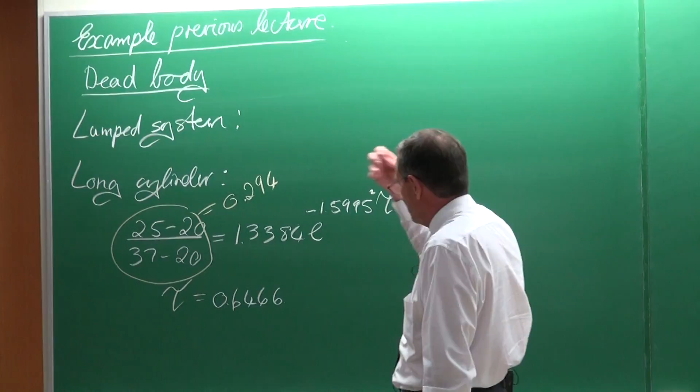Going back to the previous lecture, one of you did pick up that I made a mistake here with this temperature ratio. It should indeed be 0.294. And if you recalculate tau, it should be equal to 0.5923, and then the number of seconds works out to about 90,223 or something like that.

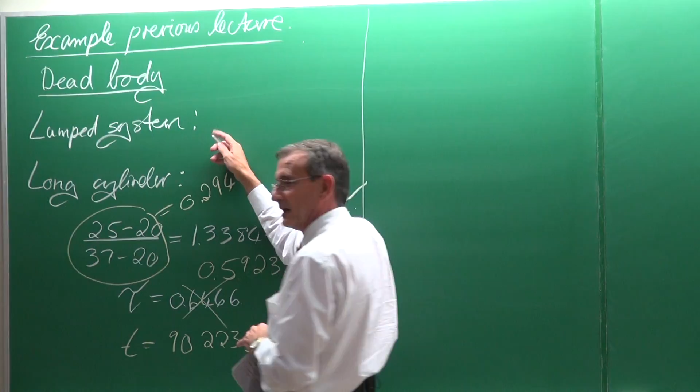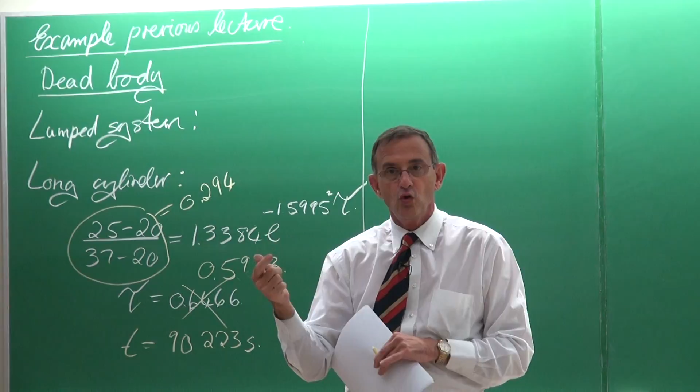Something I maybe missed yesterday to specifically emphasize is that yes, we've used the lumped system approach, but I just did it as an illustration. That doesn't mean it is valid. I've indicated that the Biot number shows that you cannot use it, and our other criteria were that it is only valid for small bodies and bodies with high thermal conductivity. So the lumped system approach is a no - you cannot expect to get good results with it.

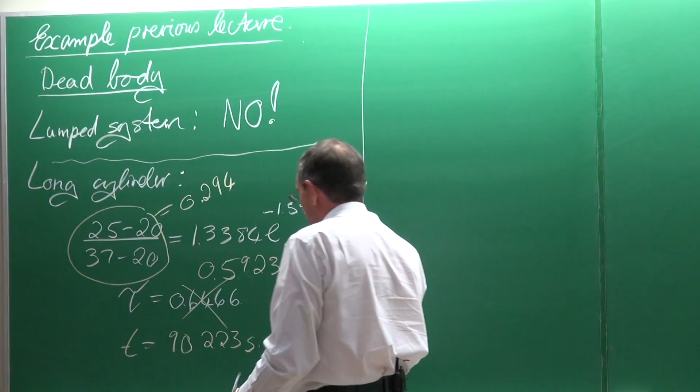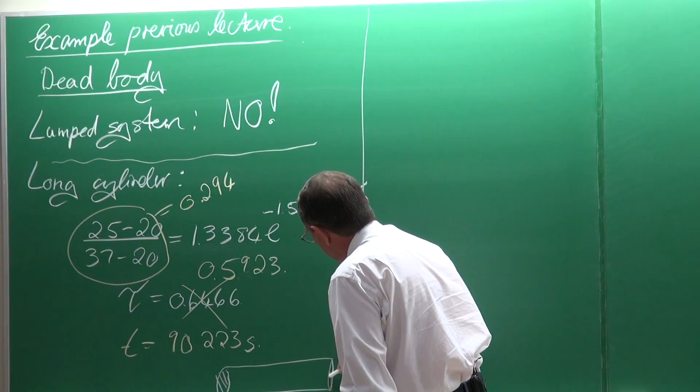The second approach was still not perfect, which was a long cylinder approach - treating the dead body as a very long cylinder. Very long, meaning that the heat transfer rate through the top and bottom areas would be negligible compared to the total surface area. But at least it is a much better approximation than the lumped system approach.

Now today what we're going to do is transient heat conduction in semi-infinite bodies.

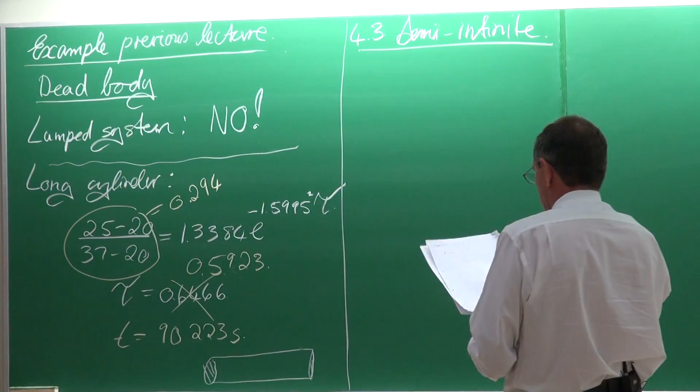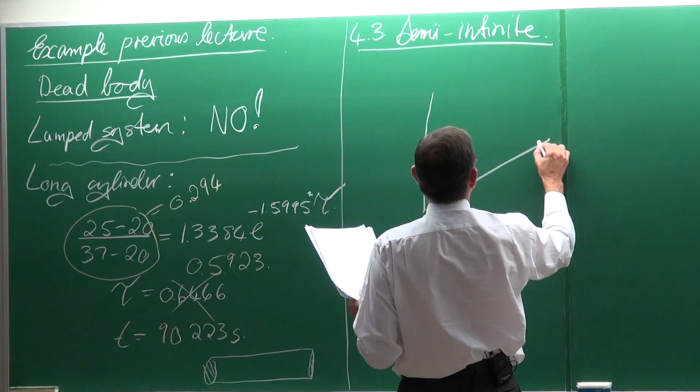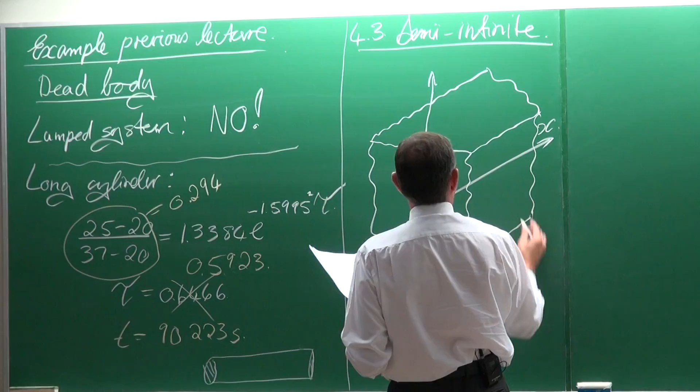Now immediately if you see the word semi-infinite, you will ask, what do they really mean? A semi-infinite body is a body which actually has a single plane surface. I'm going to show it in terms of a coordinate system - in the x direction, like that. This body will have a plane surface, like this. And with that, I mean it's flat, or relatively flat. Then it is infinite in size in the x direction, as well as in the y direction and the z direction.

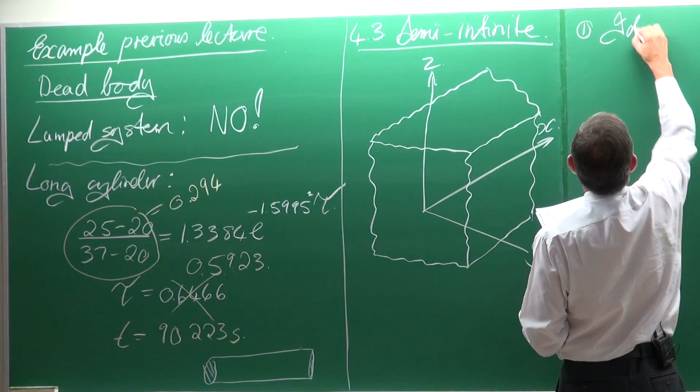So a semi-infinite body is firstly an idealized body. Secondly, it has a single plane wall - with that, I mean that surface area there. That is the single plane wall.

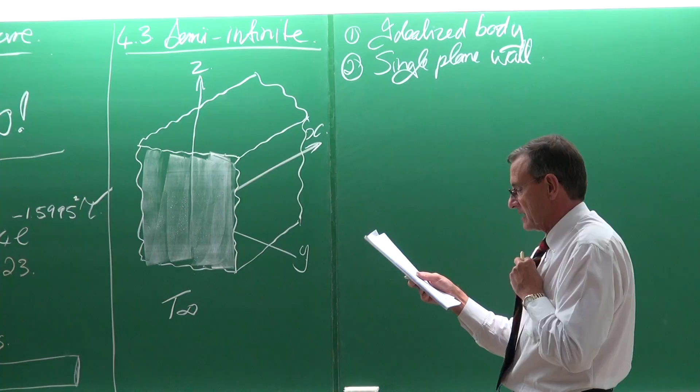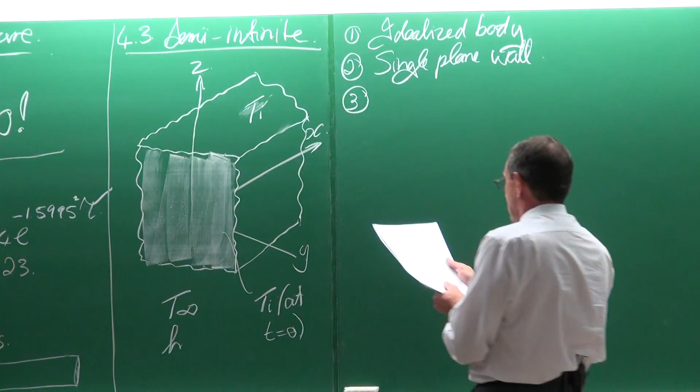This body, or the surface, will originally be at a temperature Ti. On the outside of this surface, we will have a temperature T infinity, as well as a heat transfer coefficient on the outside surface. That surface temperature would be Ti at t equals 0, and the temperature of the rest of the body would be equal to Ti, constant for the rest of the body. So the third property of a semi-infinite solid is that the temperature change is close to the surface only. The temperature of the rest of the body is not going to change - so the fourth property is that the rest of the body has no temperature change.

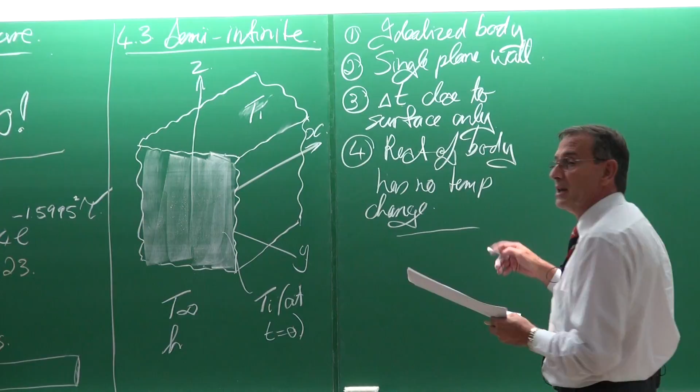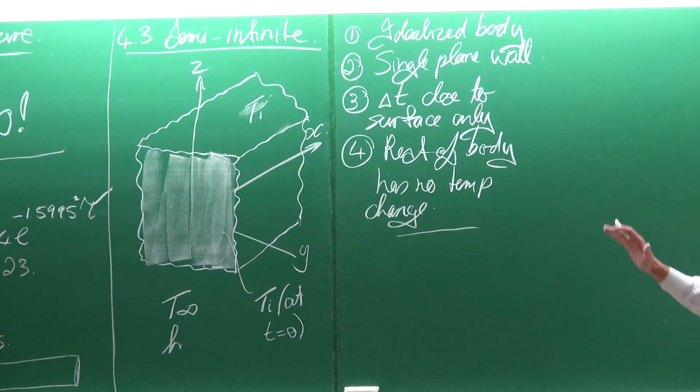Now, the next thing would be to try to answer: which bodies are we talking of? Typical good examples of semi-infinite solids would be, for example, the surface of the Earth. On a certain surface, at a certain place, there will be a temperature change, and that temperature change will occur very close to the surface, but it wouldn't influence the rest of the surface. That would be a good example of a semi-infinite body.

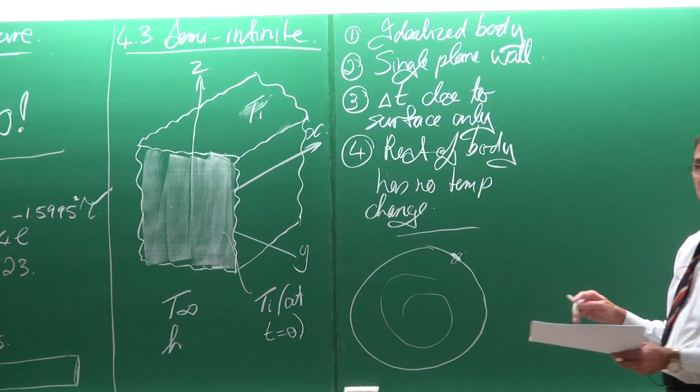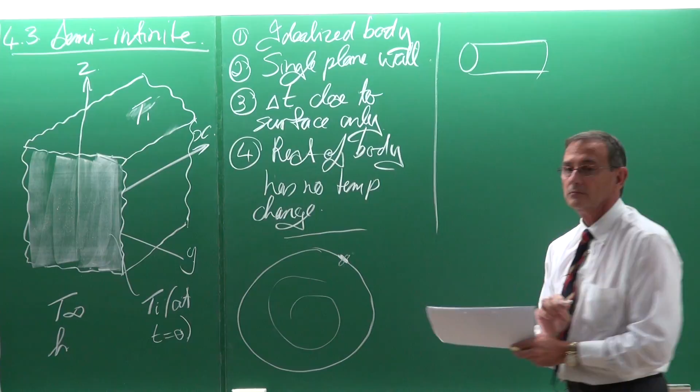Another example might be you as a person - you would say, but how can that be? It would be, again, our dead body, if I can show it as a cylinder. It would be the case of maybe a surgical procedure, or not a dead body, maybe a living person, but you want to do surgical treatment with a laser. The laser is just for a split second, on the surface of the skin, and there's temperature change very, very close to the skin. Then the temperature of the rest of the body is not going to change, because if it does, it would be fatal. Also, maybe this wall.

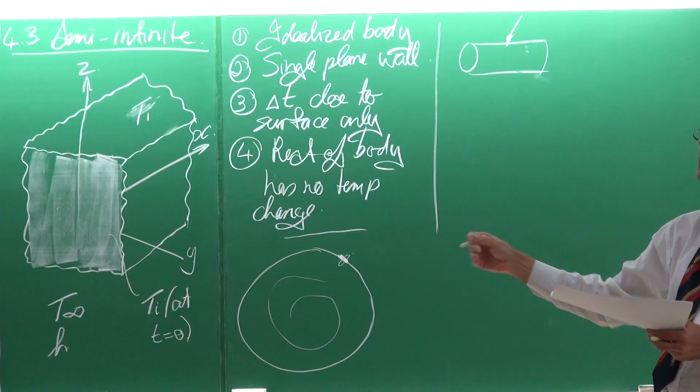If the wall is very thick, maybe 300 or 600 millimeters, and the temperature in this room suddenly changes from 25 to 0 degrees Celsius, and we only want to know how the temperature changes within the first few millimeters after 1 or 2 minutes, then this is also an example of a semi-infinite solid. Because after 10 or 15 minutes, if the temperature goes back to 25, the temperature in the rest of the wall won't change at all.

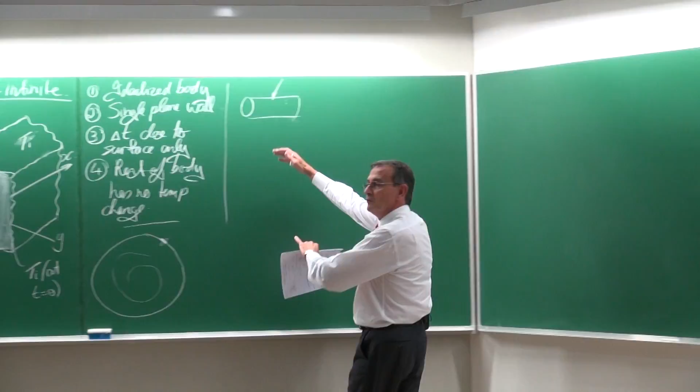So those are typical examples, and you always have to use your discretion about when to use the semi-infinite solid method. So when we do the work, I won't just give you the formulas. We do the derivation in many cases, not in all detail, but it's extremely important that you understand where it comes from, because that's the only way to ensure you apply it correctly. If you just try to learn the formulas and apply them to problems, you're going to make big mistakes. So it's very important that you understand the theory.

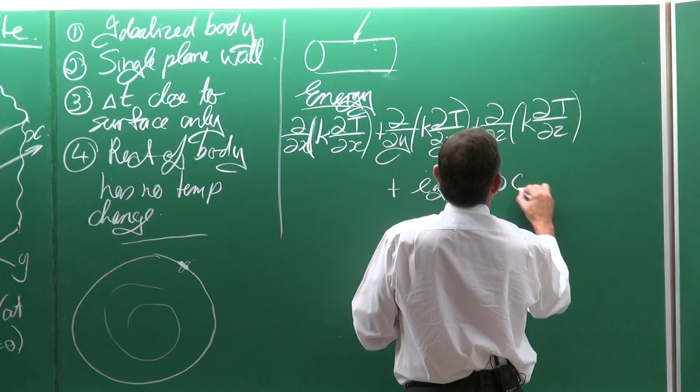So let's look at where the solution of the semi-infinite solid comes from. Again, it starts with the energy equation: d/dx of k partial dT/dx, plus d/dy of k partial dT/dy, plus d/dz of k partial dT/dz, plus E generation, equals rho c partial dT/dt. The one T is for temperature and the other t is for time.

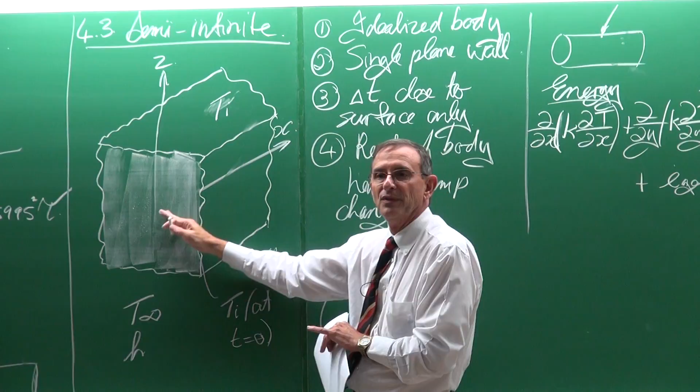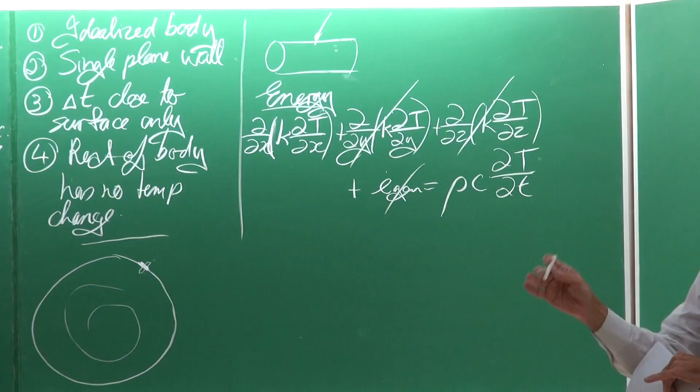Because this body is so big, the heat transfer rate at the surface will only occur in one direction, the x direction, because in the y and z directions we have an infinite surface on which the temperature change occurs. So those two terms are negligible. Again, it's a one-dimensional approach, an assumption we make. And we also say that the generation term is equal to zero because there's no chemical or nuclear reaction on the inside.

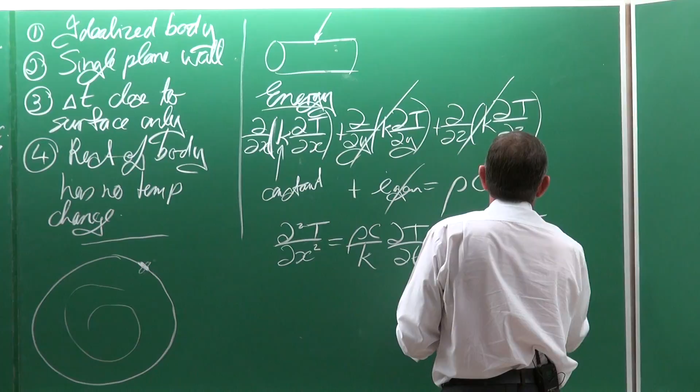So the result is that, because k is a constant, we can write partial d2T/dx squared equals rho c divided by k, partial dT/dt, or we can write it as 1 divided by alpha, partial dT/dt, where alpha is the thermal diffusivity. So again, it's the same equation we previously had for the plane wall.

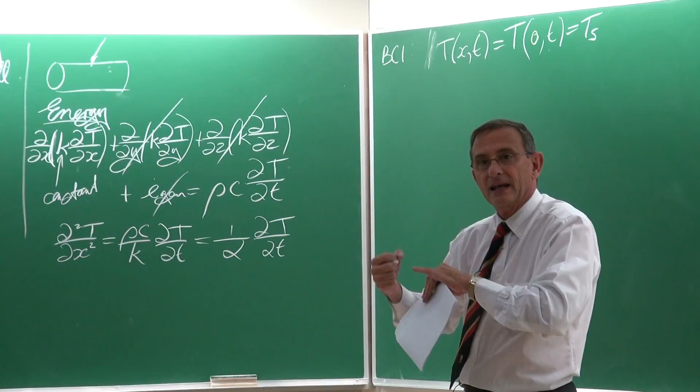However, the boundary conditions are different. The first boundary condition is: temperature T(x,t) equals, where x equals 0, the temperature suddenly changes to the surface temperature. So previously it was Ti, and at t equals 0, the plane surface temperature changes to Ts. That's the first boundary condition.

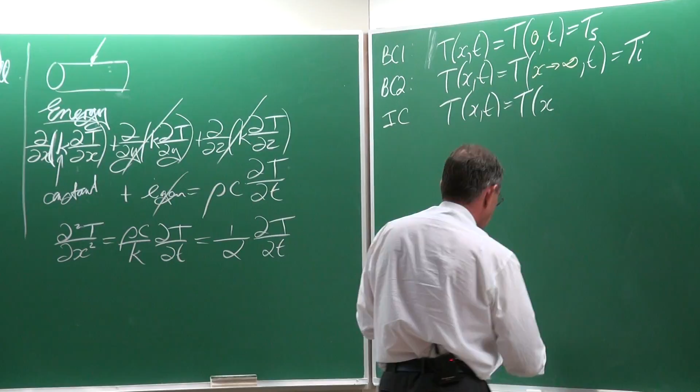The second boundary condition is that T(x,t), where x is infinite, the temperature is equal to Ti - our second boundary condition. And the third boundary condition is our initial condition: T(x,t) at time 0, temperature is Ti. And those are our three boundary conditions.

However, we cannot use the separation of variables method in this case. It doesn't work because the body is infinite - that's the mathematical reason if you try to do it. We have to use another method of changing the partial differential equation into an ordinary differential equation. So how do we do it?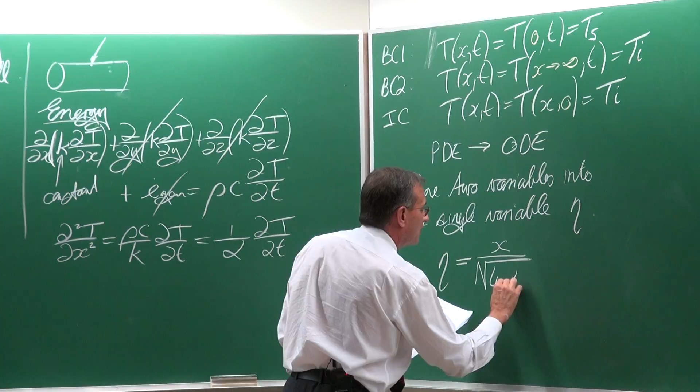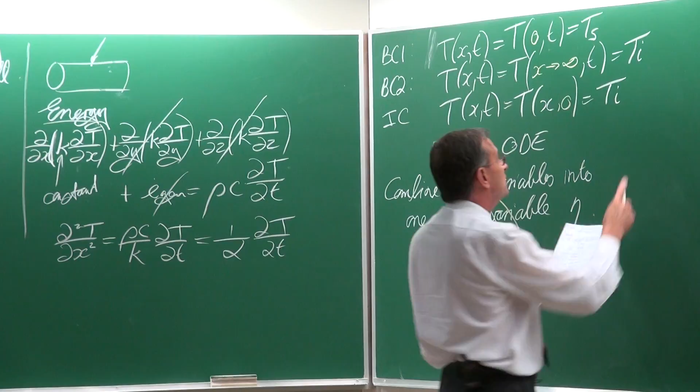Well, with a trick: we combine two variables into one single variable. That single variable is eta, defined as x divided by the square root of 4 times alpha t. So the two variables we're referring to are x and t. When we put them together, now we have only one variable, and it's much easier to change this partial differential equation into an ordinary differential equation.

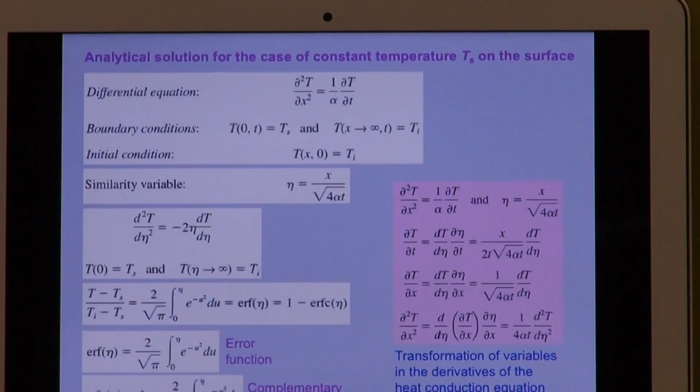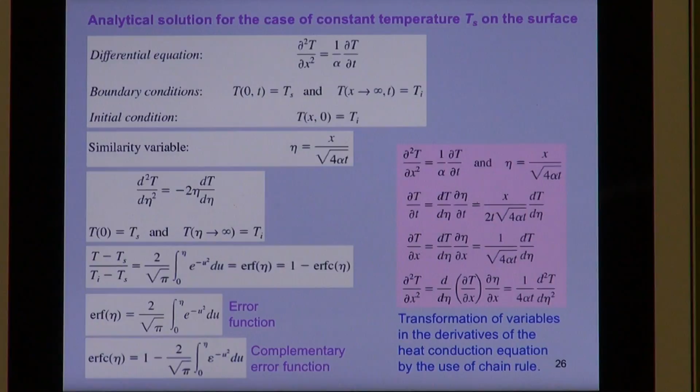Let me show it to you on the screen also, so you can see a little bit more detail. I'm not going to go into all the detail, but the result is that we can now write an ordinary differential equation as d2T/d eta squared equals minus 2 times eta dT/d eta, and that is equation 1.

Now, with this equation and using this single new variable eta, we have to rewrite our boundary conditions 1, boundary conditions 2, and boundary conditions 3. Then you can solve it, and the result is...

an equation looking like this: T minus Ts divided by Ti minus Ts equals 2 divided by the square root of pi, times the integral from 0 to eta of e to the minus u squared du. If you wonder what u is, it's just a dummy variable that you need to complete the integration with.

Now the result of this integration has no exact solution. You have to do it numerically, and people refer to that as the error function in eta. The result is the error function in eta, which can also be written as 1 minus the complementary error function, not the error function itself, but the complementary error function. This is equation 4.43 in your textbook.

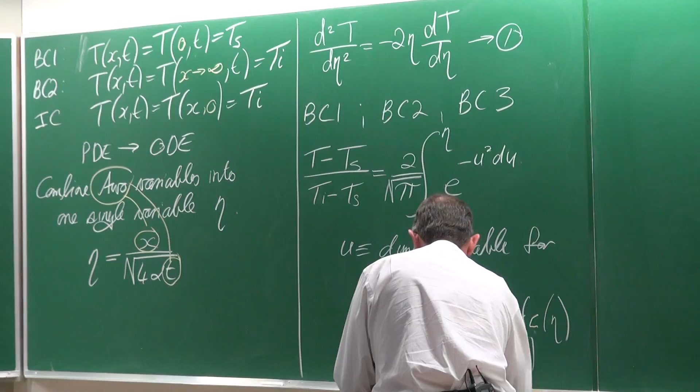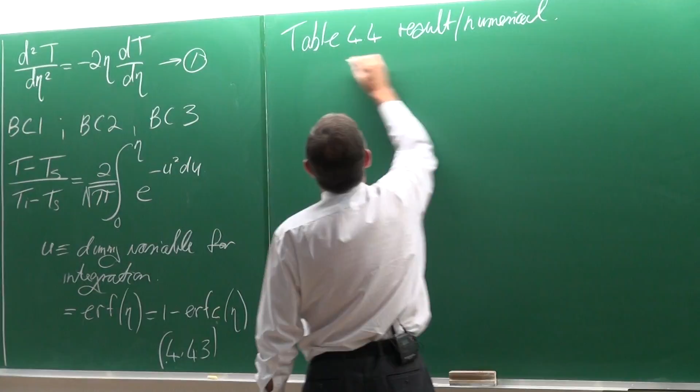So there's no analytical solution for this integration. You have to do it numerically, and the result is given in table 4.4 in your textbook. So the result is of a numerical integration. Let's look at it quickly in table 4.4, and that is the result there.

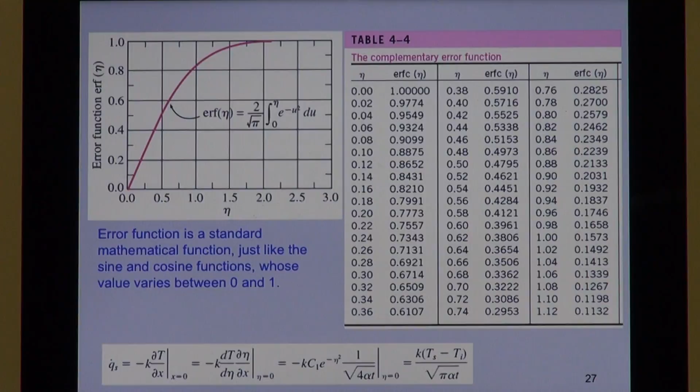On the left, you will also see a graph of the error function as a function of eta, so that is how it looks like. Table 4.4 gives typical values of eta, and then it gives the complementary value, not the error function itself, but the complementary one. So if you look in table 4.4, you will see different values of eta and corresponding values for the complementary error function.

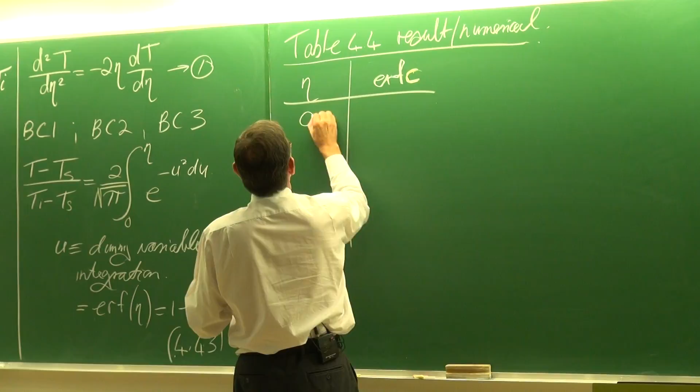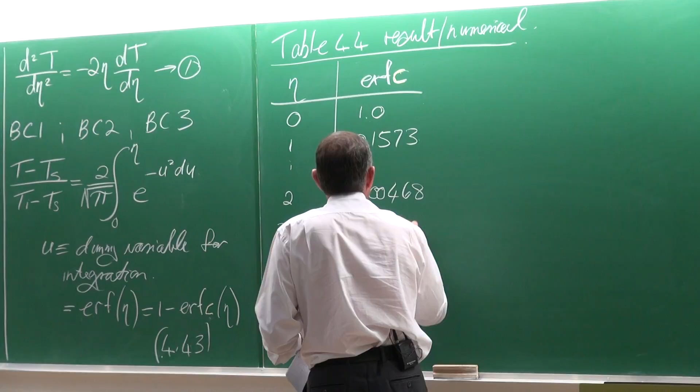If you agree, you'll see that typically if eta equals 0, then that value is equal to 1. If eta equals 1, it is 0.1573. If eta equals 2, it is 0.00468. It's very important to observe what happens with this value, because when you get to eta equals 3.6, it is already 0 for 5 digits, very small.

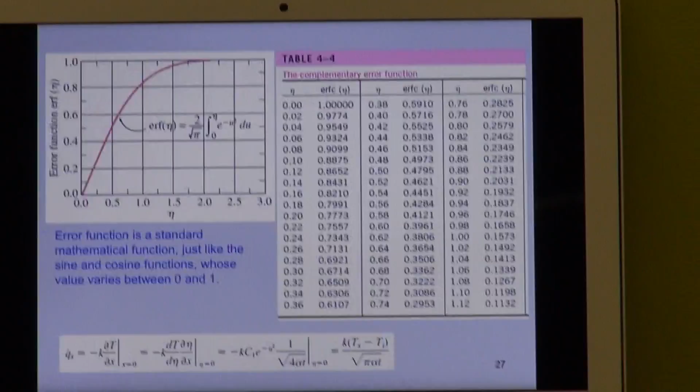So look at the graph also. If you look at the graph, you will see what happens with the error function itself. At eta equals 2, it starts becoming 1. That's the error function, not the complementary error function. So the complementary error function is 1 minus that, and therefore you can see the value approaches 0. This is an important observation.

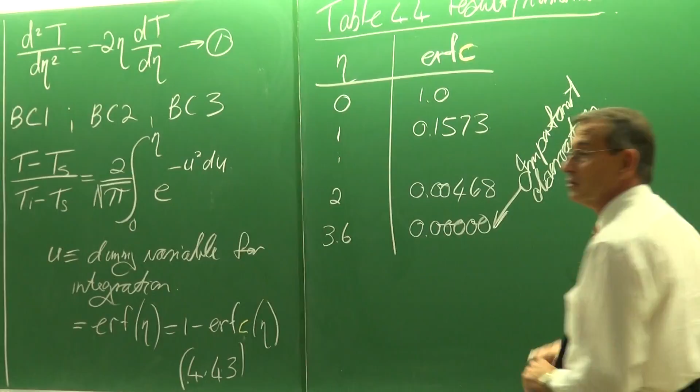If you take notice of this, it can save you a lot of time in tests and exams, because there were many such problems in previous tests and exams where if you took note of this, it would really save you a lot of time. I'm going to do an example like that a little bit later.

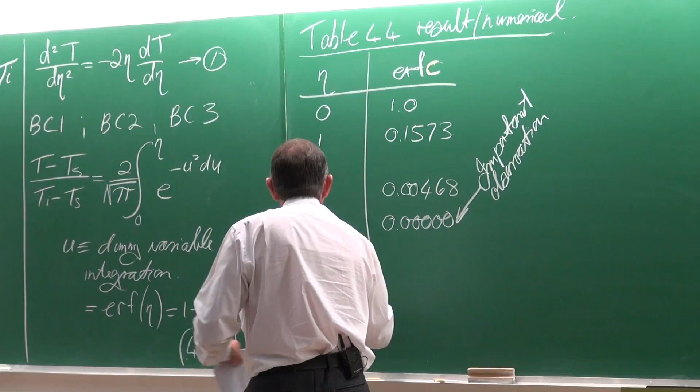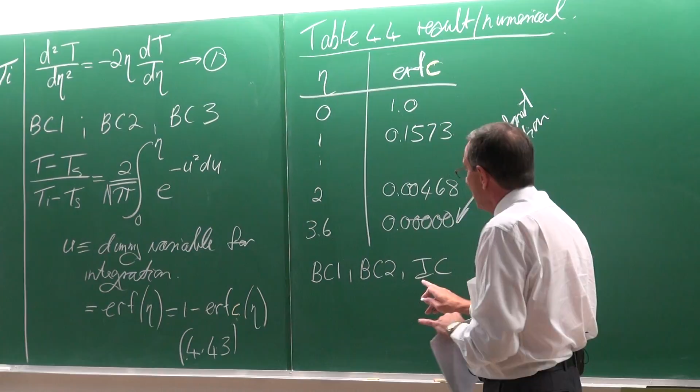What is important, however, is to realize that the specific boundary conditions that we have used - boundary condition 1, boundary condition 2, and the initial condition - and yes, we did write them in a different format, but the result of those boundary conditions gives this answer.

Now, there are other types of boundary conditions that may be used. For example, you could have specified that at x equals 0, the temperature is not constant, but you've got a constant heat flux, maybe solar radiation on the surface, but you do not know what the temperature is - that's a different boundary condition. Or another boundary condition could be where the surface has a cold stream of fluid with a certain heat transfer coefficient. That would be another type of boundary condition.

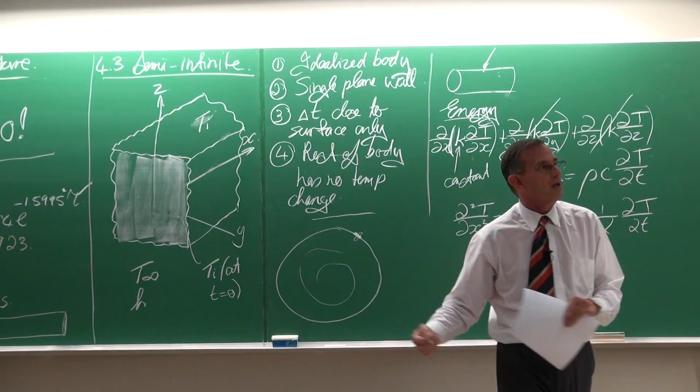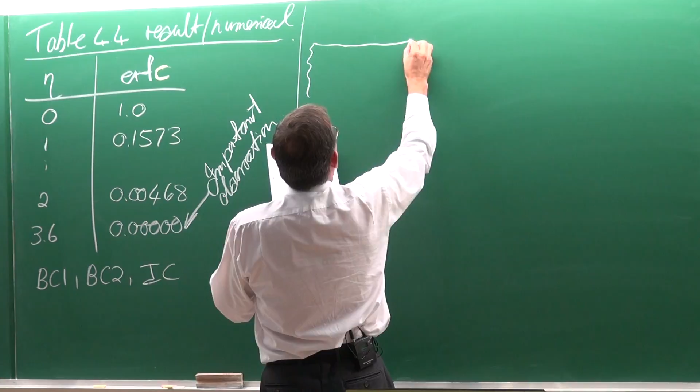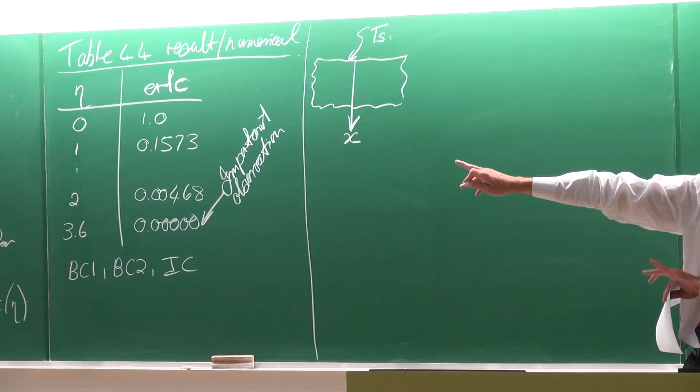Therefore, in this part of the textbook, 4 case studies are summarized with different boundary conditions, and I'm going to show them schematically. So the first one - remember, in this dimension it's infinite, and that dimension is infinite - the case 1 boundary condition is where the temperature is specified as Ts. That's the one we've just done. The second type of boundary condition is where the heat flux is constant.

The heat flux, remember, small q is the number of watts per square meter. So maybe it is solar radiation, and it can be maybe 700 watts per square meter on a flat surface.

The third type of boundary condition is where over the surface at x equals 0, we've got a fluid stream at a certain temperature and a heat transfer coefficient.

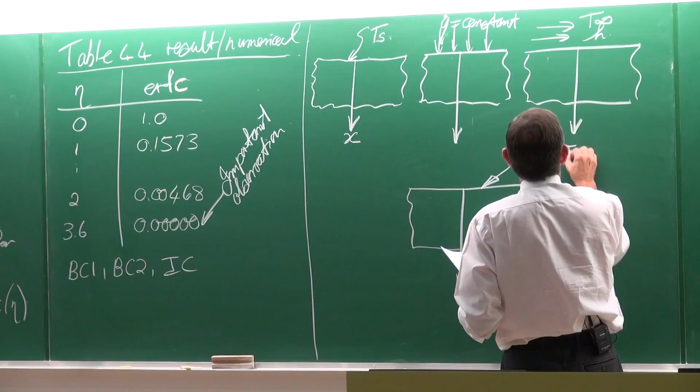That's the third type of boundary condition. And the fourth type of boundary condition is, for example, when you have a laser. With a laser, we have a pulse E, which transfers a certain number of joules per square meter. Normally the area is very small, and you've got an energy pulse just on a surface for a small period of time, normally less than a second.

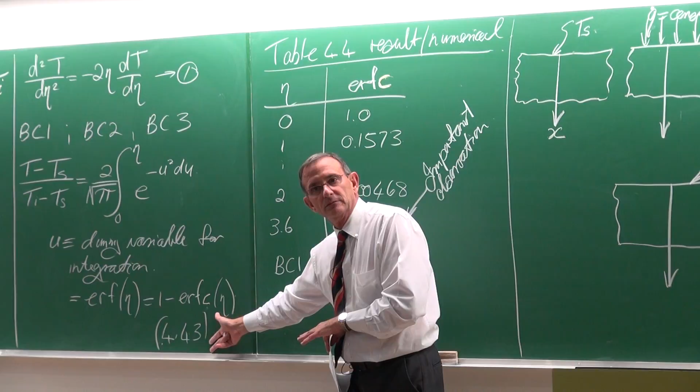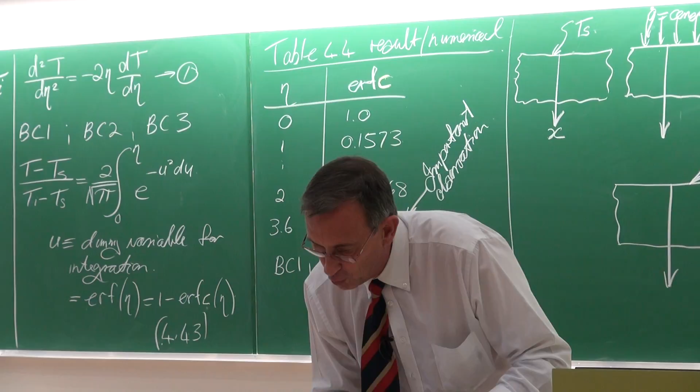So those are the 4 types of boundary conditions. All of them would give different solutions in terms of the error function, some more complicated, some easier. Those are summarized in your textbook as equations 4.45 to 4.48.

Let me show them to you, how they look like. There they are, all 4 of them: case 1, case 2, case 3, case 4. For case 1, the specified surface temperature Ts, we didn't do it, but it is in the textbook.

You can also solve the heat flux on the surface there, and there's a formula for that. Case study 2, the heat flux on the surface is constant. Case study 3, convection on the surface, that long one. And then case study 4, the energy pulse.

If you look at that, you'll see case study 3 is actually the one that looks more complicated and looks like it is much more work to solve than the other equations. Do you agree? Okay, so for that reason, let's do such an example.

Since it looks so complicated, the example would be over the surface of the Earth.

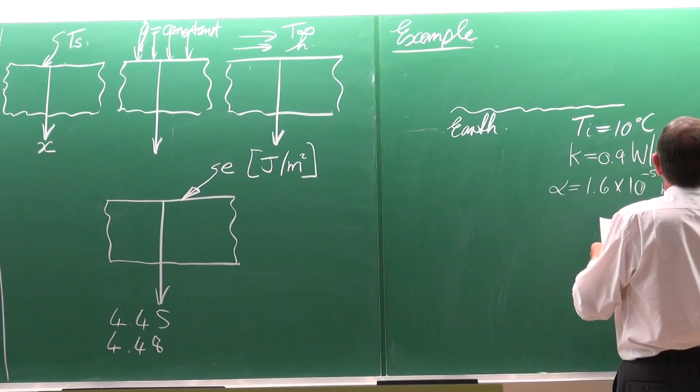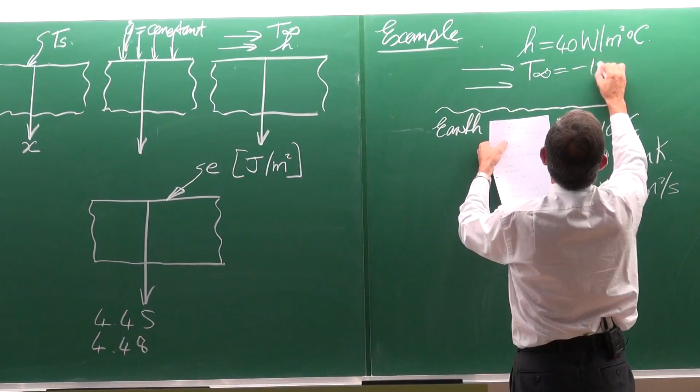And at T equals 0, we've got a cold wind with a heat transfer coefficient of 40 watts per square meter degree Celsius, and a temperature of minus 10 degrees Celsius. So at T equals 0, the cold wind starts blowing over the surface. That is the heat transfer coefficient, and that's the temperature.

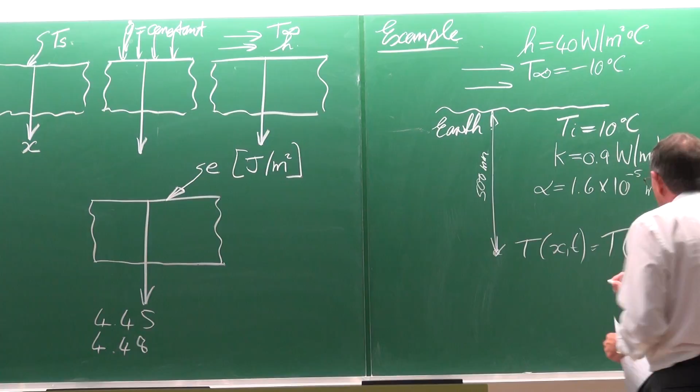What we want to know is at a depth of half a meter, 500 millimeters, from the surface -- so X equals 0.5 -- what will the temperature be after 10 hours? Do you all understand the problem?

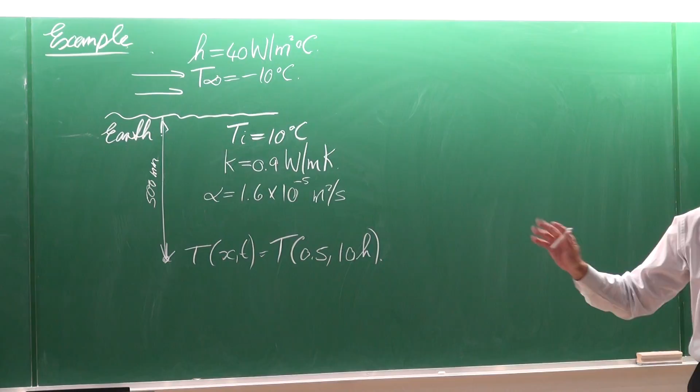So we've got the Earth originally at 10 degrees Celsius for the first few meters. Thermal conductivity is 0.9, alpha is 1.6 multiplied by 10 to the minus 5. At T equals 0, the wind starts blowing over the surface. The heat transfer coefficient is 40, and the wind temperature is minus 10 degrees Celsius. The question is, at a depth of 500 millimeters, what will the temperature be?

Is this just a theoretical problem, or are there any practical solutions? Yes, there are many practical solutions. Normally with surfaces like water underneath the surface, we would like to know if it's going to freeze or not, so you want to make sure the depth is deep enough so that doesn't happen. In some cases, chemicals are being transported, power lines, etc. There are many applications where you would like to know underneath the surface of the Earth, what will the temperature be as a function of time.

So this is a classical example of a semi-infinite solid. It is close to the Earth's surface, half a meter, if you compare that with the diameter of the Earth -- very close. Originally it's at a stable temperature, now suddenly we've got the wind flowing over it.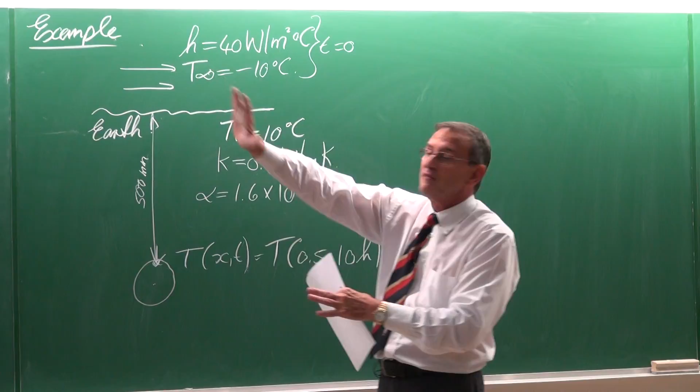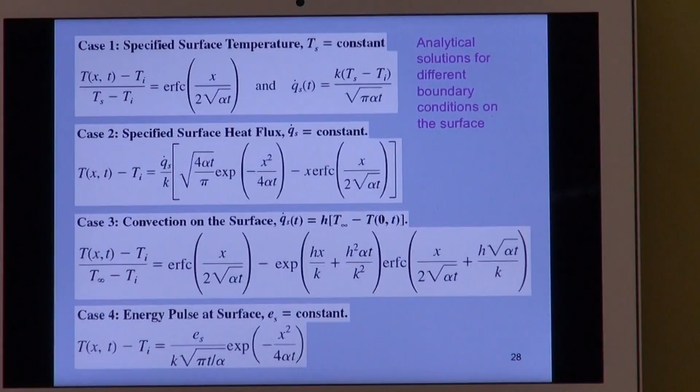If we look at the 4 different case studies -- Cameron, if you can just show it to us again -- the obvious one that we want to solve is case study 3, isn't it? It gives the heat transfer coefficient and the temperature of the wind flowing over the surface.

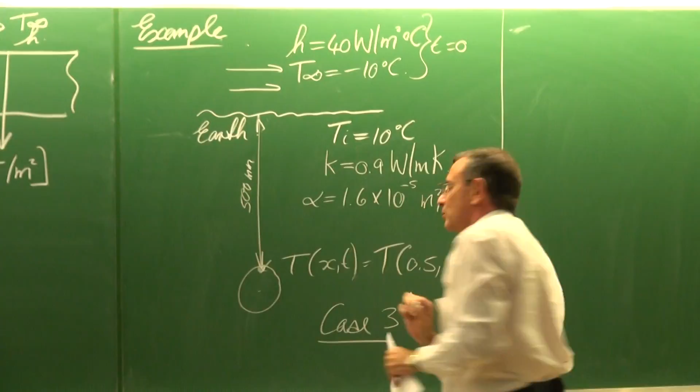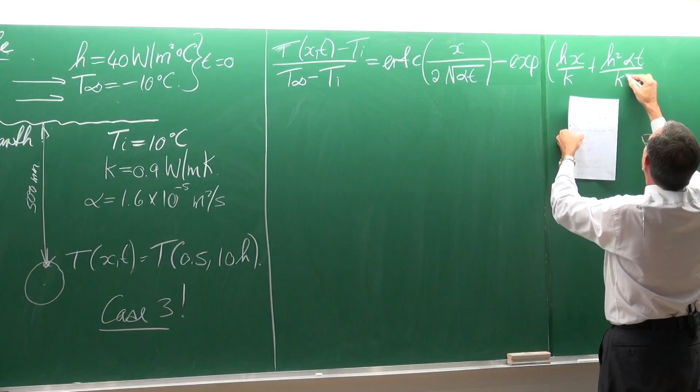So it is unfortunately this long equation. Let's make sure you all understand, we are referring to case study 3. That case study says the temperature as function of time minus Ti divided by T infinite minus Ti is equal to the complementary error function of X divided by 2 times the square root of alpha T, minus the exponent of Hx divided by K plus H squared alpha T divided by K squared, multiplied by the complementary error function of X divided by 2 times the square root of alpha T plus the heat transfer coefficient multiplied by the square root of alpha T divided by K.

Long equation. In the test and exam, what is the best approach to try to solve something like that? Well, the best approach is normally to take these things and break it up into smaller terms, looking at them on a term-by-term basis.

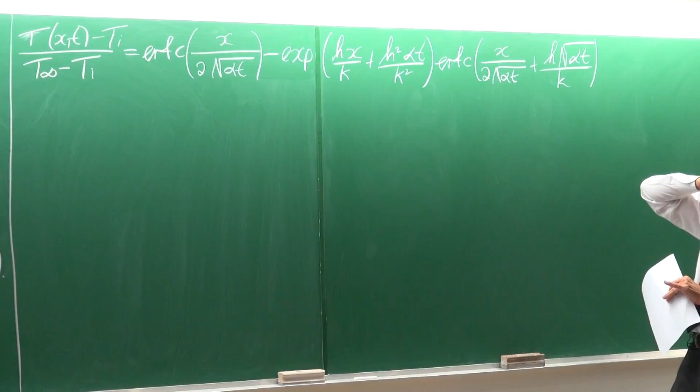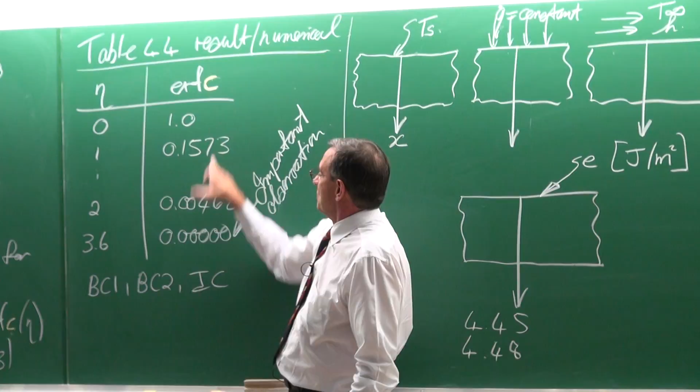However, once you've done many of these, you'll realize you actually have the complementary error function of something. If we go back to table 4.4, if eta is typically larger than 3.6, then the complementary error function goes to 0. So if this is more than 3.6, that term is 0, and 0 multiplied by that means you end up with one term. That's exactly what happens now.

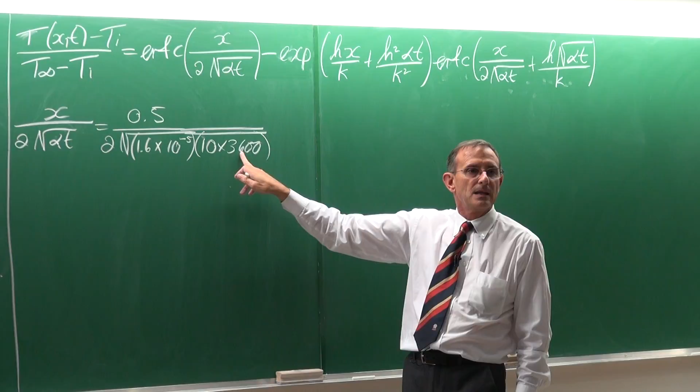Let's look at that term first: x divided by 2 times the square root of alpha t. X would be equal to 0.5 divided by 2 times the square root of alpha, 1.6 multiplied by 10 to the minus 5, multiplied by 10 hours of 3,600 seconds per hour. The result of that is equal to 0.3294.

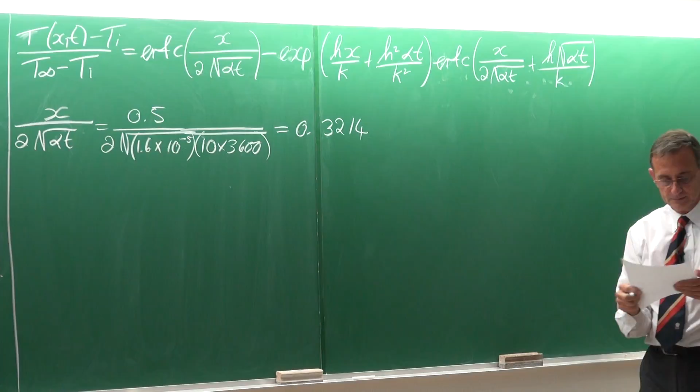Let's jump to that other term: the heat transfer coefficient multiplied by alpha t divided by k. The heat transfer coefficient is 40. Alpha is equal to 1.6 multiplied by 10 to the minus 5. The time t is 10 hours of 3,600 seconds, divided by the thermal conductivity of the ground, which is 0.9.

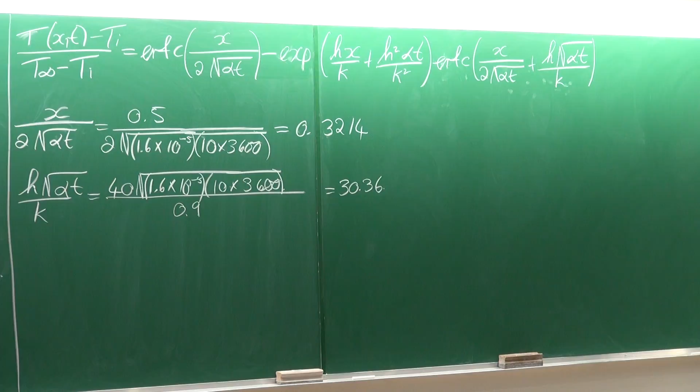The result of that is equal to 30.36. So if we look at this term, the result is 0.3214, and the result of that other term is 30.36. Those two together are by far larger than the value of 3.6. Therefore this term is equal to 0. 0 multiplied by that means this whole term disappears, so we don't have to calculate it. The result ends up as a very simple case, which we've already solved.

So we've already solved that: the temperature T(t) minus Ti divided by T infinite minus Ti is equal to the complementary error function of x divided by 2 times alpha t. And this is equal to, let's do the substitution here. We want the temperature as function of time minus the initial temperature of the Earth, which is 10, divided by the temperature of the wind stream, minus 10, minus the initial temperature, equal to 10, is equal to the complementary error function of 0.3214.

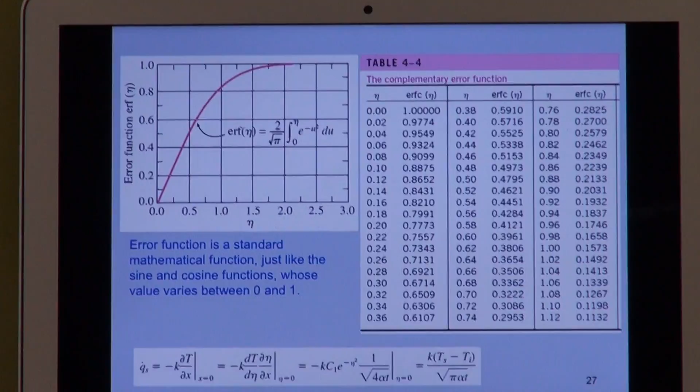If you look in table 4.4, where eta is equal to approximately 0.32, the complementary error function is equal to 0.6509. Do you agree? The complementary error function where eta equals 0.3214, in the table, is about 0.6509. So the only unknown is now the temperature as function of time, which we can solve, and it means that the temperature, where x equals 0.5, after 10 hours, is equal to -3 degrees Celsius.

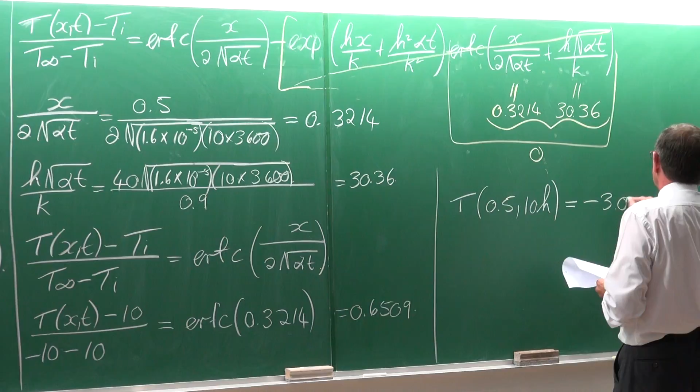Okay. Any questions, ladies and gentlemen? Yep.

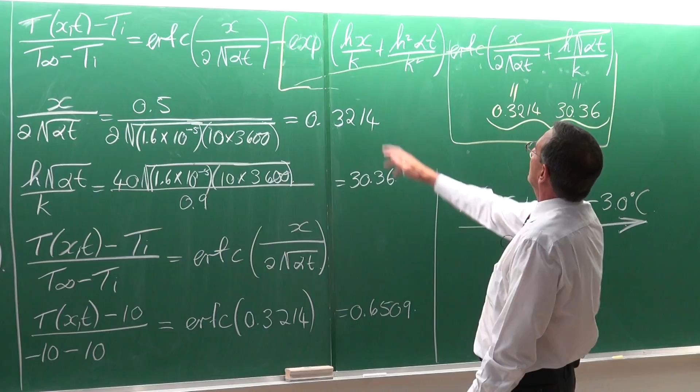The exponent, does it include that whole bracket? No. Yes, it is the exponent of this multiplied by the error function of that. So it's the exponent of everything there multiplied by that, and that is now equal to 0. So it is 0 multiplied by that. It's all equal to 0.

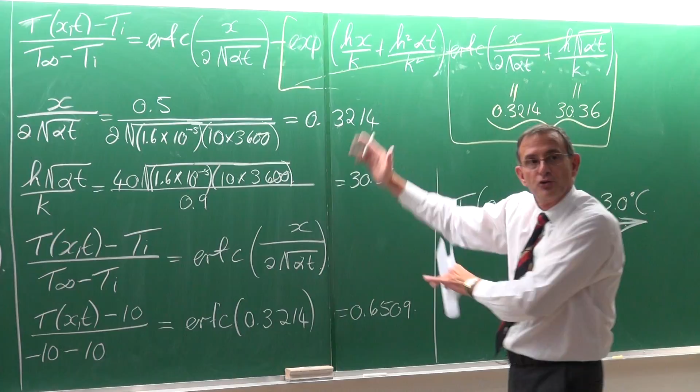So be careful in the test and exam that you don't just start crunching through all the calculations. It can really save you a lot of time and make things much simpler. Any questions, ladies and gentlemen? If not, thank you. That's the end of the lecture.